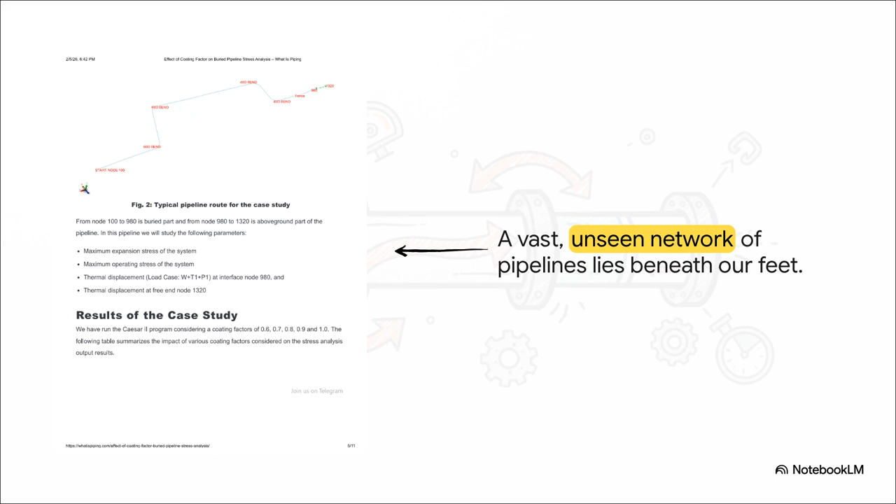We've got this colossal network of steel tubes buried under tons of earth and rock, and they're carrying everything from oil to natural gas at super high temperatures and pressures. So what's stopping them from just tearing themselves apart? Just take a look at this. This is only a diagram of one small section. Now try to imagine this stretching for thousands upon thousands of miles, like a hidden circulatory system for our entire economy. And you got to remember, every single inch of that pipe is in a constant battle with physics, a battle it has to win every second of every day.

Okay, so let's dive into what that battle actually looks like. Because to really get the solution, you first have to appreciate the sheer power of the problem that every single one of these buried pipes is up against. So, it all kicks off with a super basic law of physics: thermal expansion. Hot stuff flows through the pipe, right? That heats up the steel. And what does hot metal do? It wants to get longer. It wants to expand. But here's the problem.

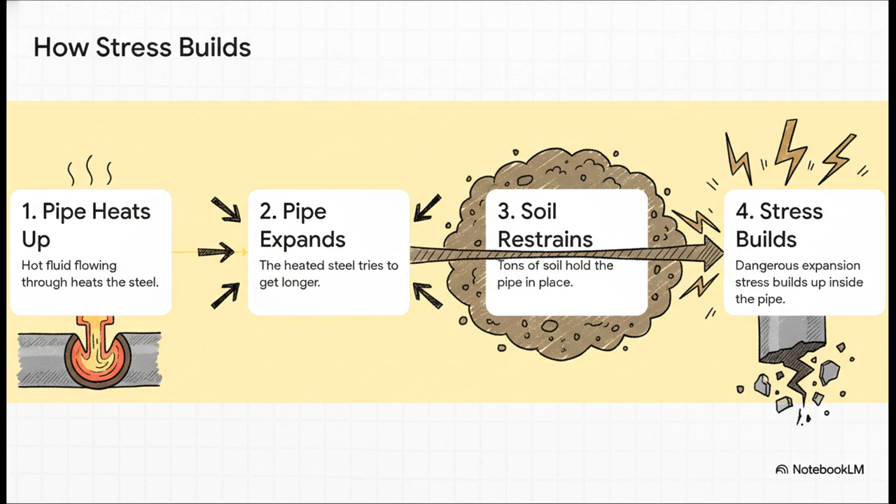It can't. It's pinned down, buried under tons of soil that holds it in place. It's literally like stretching a rubber band to its absolute limit and just holding it there. That stored energy, that's called expansion stress. And if it gets too high, the pipe can fail, catastrophically. So, how in the world do engineers manage this incredible stress? Well, your first line of defense is the pipe's coating. Now, you might just think of it as a protective jacket, and yeah, you'd be partly right.

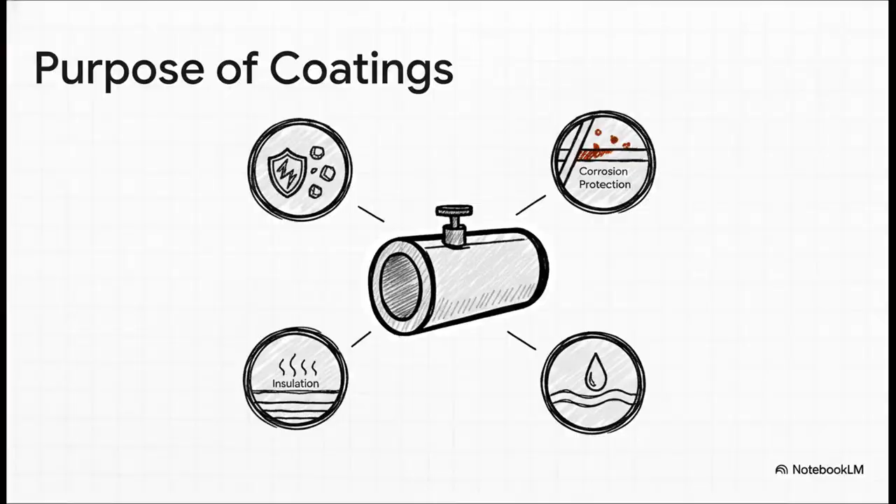At first glance, a coating's job seems pretty obvious. It stops the pipe from rusting, which is huge. It protects it from getting dinged up by rocks, it provides some insulation, and of course, it helps prevent leaks. And these are all absolutely vital functions, for sure. But, and this is the really cool part, that's not the whole story, not even close. What's so interesting here is that the coating performs another, much less obvious job that might just be the most important one of all when it comes to stopping that crazy stress buildup we were just talking about. And that is what brings us to the real unsung hero of pipeline engineering, a concept called the coating factor.

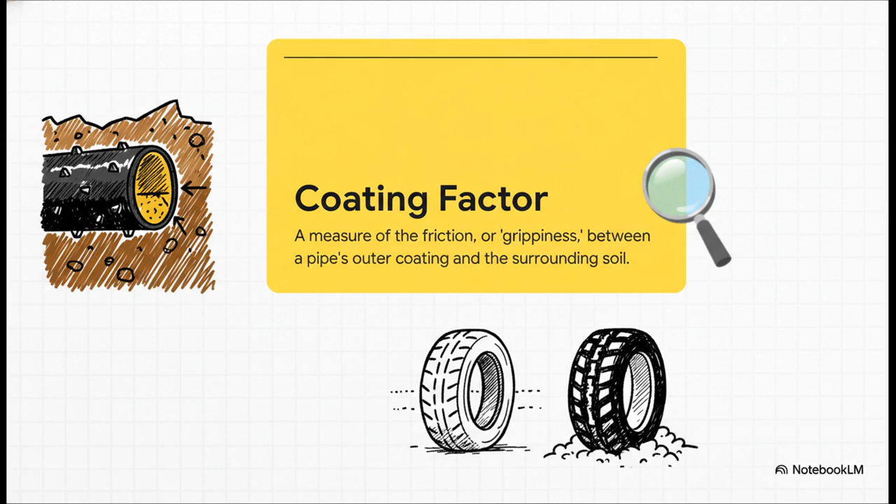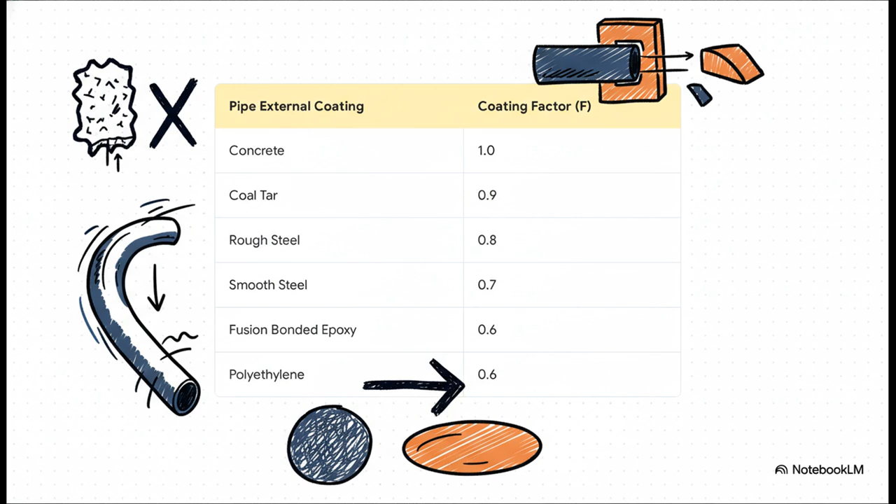The coating factor is pretty much exactly what it sounds like. It's just a number that tells you how much friction, or let's call it grippiness, the coating has against the soil. Seriously, think of it like the tread on a tire or the bottom of your shoe. Some coatings are slick and smooth, while others are rough and they really grab onto the earth. And wow, this table from the source material just lays it all out perfectly. It shows the coating factors for all these different materials. A rough concrete coating has a factor of 1.0. That's maximum grip. But then you look at a modern, slick coating like polyethylene, and its factor is just 0.6. That is a huge difference in grippiness.

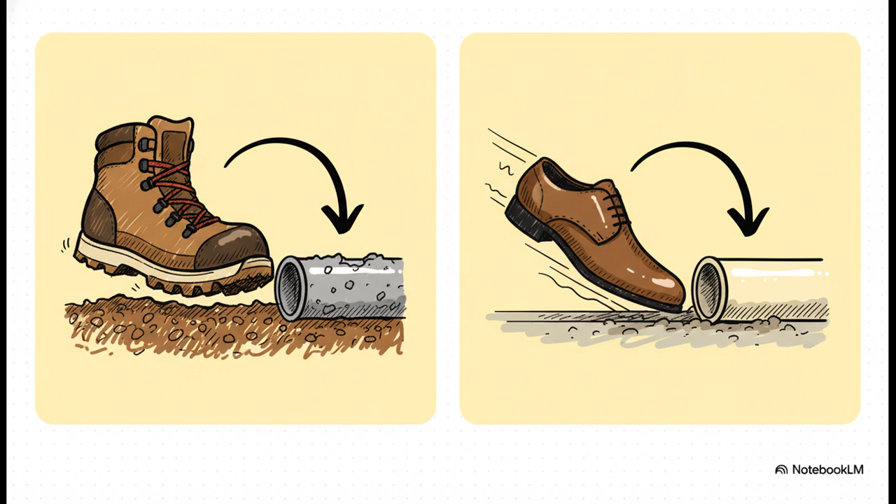Okay, to make this super clear, let's think about it like this. A concrete coating is like a heavy-duty hiking boot with these deep, rugged treads that just dig into the trail. A polyethylene coating, that's more like a smooth-soled dress shoe on a polished floor, way more likely to slip. So the big question is, which one do you actually want on your pipeline? Well, of course, engineers don't just guess, right? They need proof. So to find out how much this grip actually matters, they put it to the test.

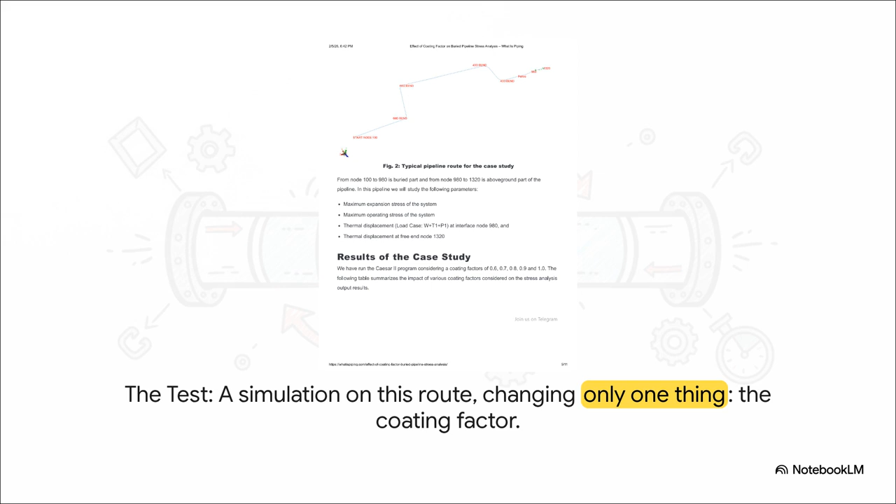The source material we're looking at details this really cool case study where they used powerful simulation software to get a real, definitive answer. So what they did was, they took this typical pipeline route you see on the screen and ran a detailed stress analysis. They kept every single thing else, the soil type, the pipe material, the temperature, exactly the same. The one and only thing they changed in each simulation was that coating factor, testing everything from that slick 0.6 all the way up to that super grippy 1.0. So what did they find out? What did this whole lesson in friction actually teach them? Well, the results were incredibly clear, and they really show just how critical this one little number can be.

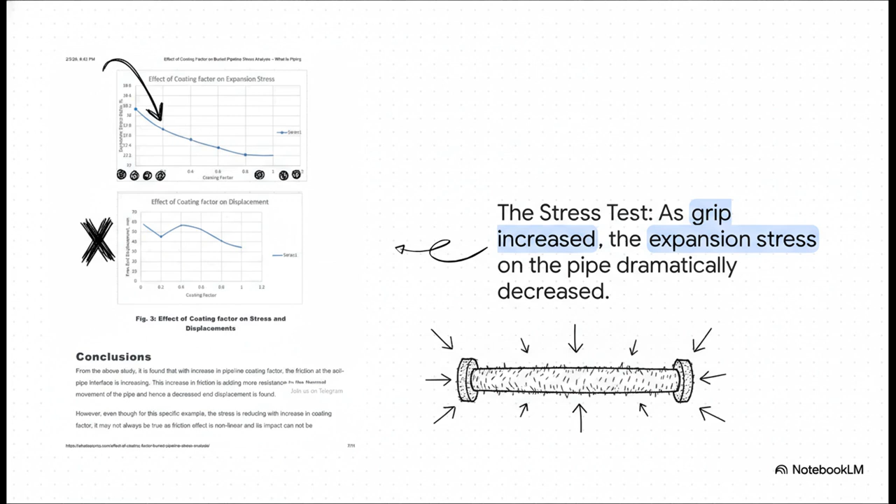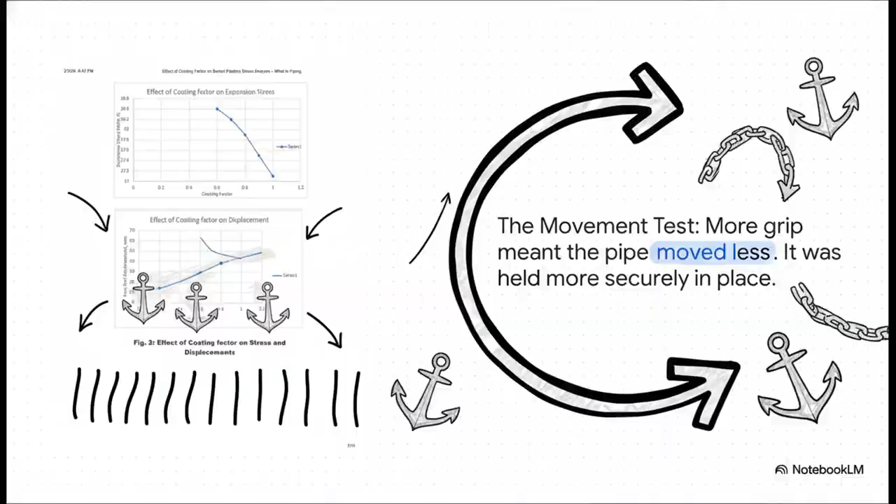And get this, it wasn't just about the stress inside the pipe. The second graph shows that as the grip increased, the amount the pipe actually moved at its free ends went way down. A grippier coating basically acts like a massive anchor, holding the whole pipeline steady against those immense forces that are trying to make it move. So, that's it then, right? Simple. Just slap on the grippiest coating you can find and call it a day. Well, in the world of engineering, the answer is almost never that simple. And this is where it gets really interesting.

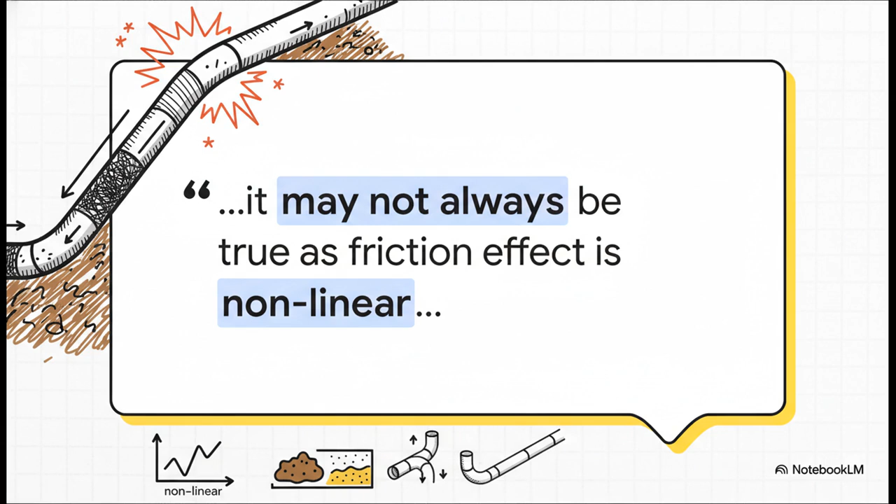The researchers themselves point this out, and this quote is just key. They say that while a higher grip totally worked for this specific example, it might not always be true, because friction's effect is non-linear. What that means is, in a different scenario, say with different soil or more bends and curves in the pipe, that same high friction coating could actually grab the pipe in all the wrong places, concentrating the stress and making the whole problem even worse. The perfect grip isn't one size fits all. It depends entirely on the unique conditions of each and every pipeline.

You know, this whole coating factor thing is just a perfect example of these hidden variables, these invisible forces that engineers have to identify and master. It really makes you wonder, doesn't it, as you go about your day, what other unseen battles are being fought in the bridges you drive over, the buildings you're in, and all the networks all around us, all just to make sure our world keeps running safely.